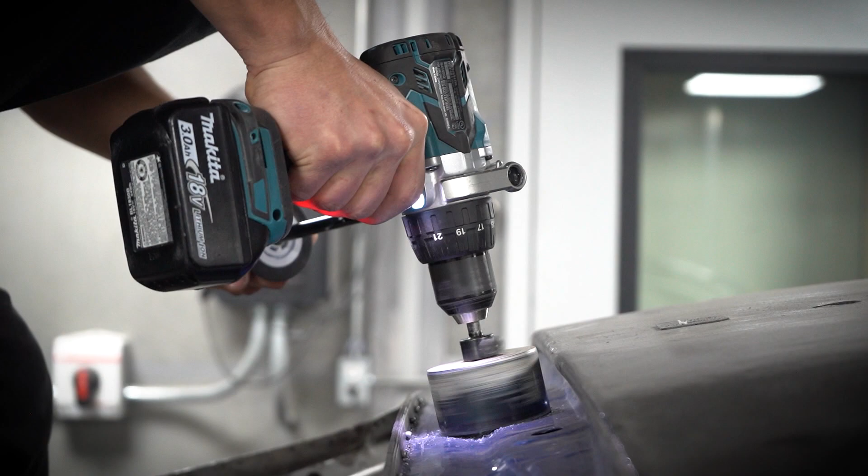So yeah, a lot of you last year have kind of asked or been curious about what goes on with Kels on a bit more of a deeper level. So Jesse had the idea of trying to show you a little bit of what we're doing here. Last year the car was really good, but there were a lot of little things that weren't quite right. So this year the main goal is to improve the downforce to weight ratio of the car. Without adding too much drag, hopefully we can increase the downforce a little bit and then get some weight out of the car. And otherwise, we're going to do a little bit of work to the engine.

You know, that engine was pretty special, as you guys know. So we're sending it off to Jim Wolf to have a go over, make sure all of his crazy ideas don't have any problems. He has the engine now, he's taking it apart. Everything looks pretty good, a tiny bit of bearing wear, which we expected. But altogether everything was pretty good. The leak down was fine, so the engine was still healthy.

We're gonna get rid of the variable cam control. That's gonna save us like 6 or 7 pounds. And we really don't need it with the electric torque in the mid-range and the sequential gearbox. So by getting rid of the variable cam control, we can increase the compression, because we were limited on the piston before with piston to valve clearance.

Now that the cam's not advancing as much, the piston can have smaller reliefs on the intake side, so the compression will go up more. The rings can move up higher because they were held down by the pocket for the intake cam, so that'll help a little bit as well. Otherwise, the engine's mostly the same, maybe a different camshaft for the exhaust. We had the header Swain Tech coated to try and keep some heat out of the engine bay. That's pretty much it for the engine side.

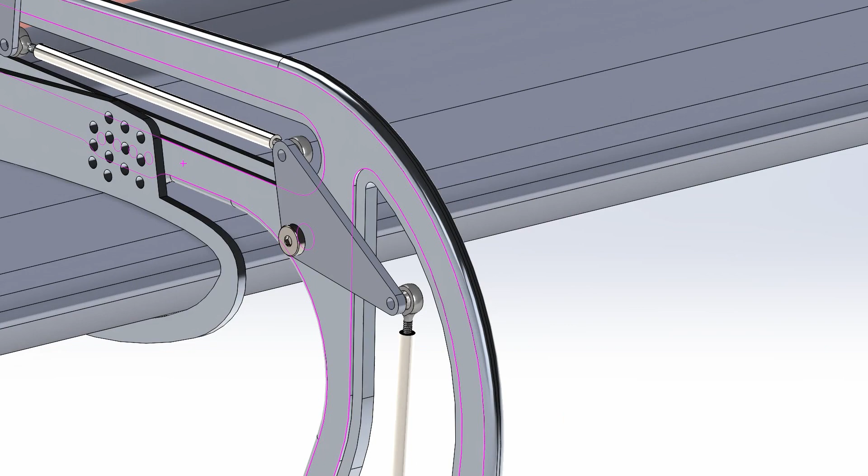So we looked at doing this a few different ways. I think the best way to do it, the simple, light way to do it, is just going to be through pulling up the flap like in Formula 1 and just breaking the second flap from the main element and just having the two wings running at basically zero angle of attack in the straightaways, and then the Motec will control all of that.

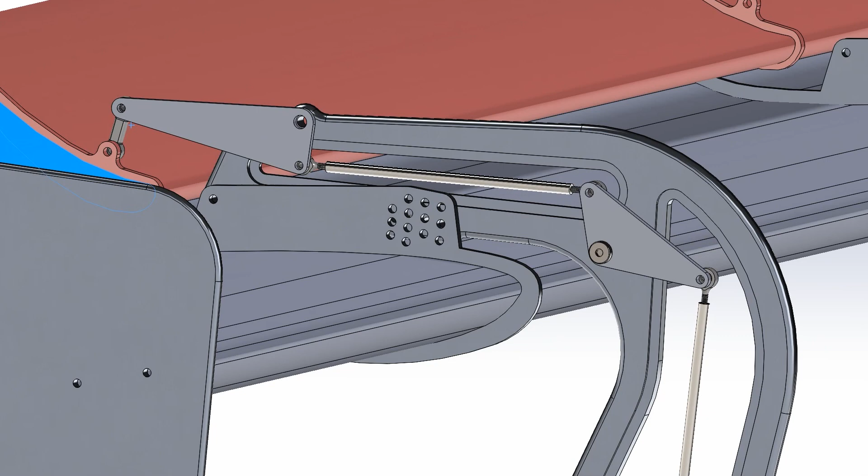Obviously, we'll have a safety in place with detection of the position. So basically 2 seconds or so before the braking zone, the wing will close. If it doesn't close, I'll be alarmed early enough in advance that I can brake in a straight line, because obviously the car will be really front aero balance at that point, so you won't want to trail brake at all. So brake in a straight line and get the car slowed down enough without losing control by the time you have to turn in.

So I think with that safety in place, we should be okay, even if we have a failure in the control system. What else do we have here? We're hoping to do a new diff. That would be really great. The Nissan differential is just getting really hot. That diff that's in the car's had a tough life, so we're excited that we've got something coming that might be really great, but it's too early to say for sure.

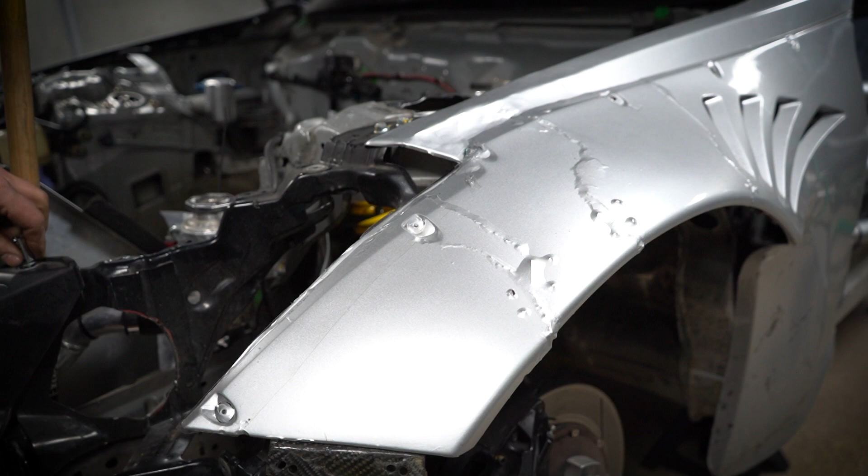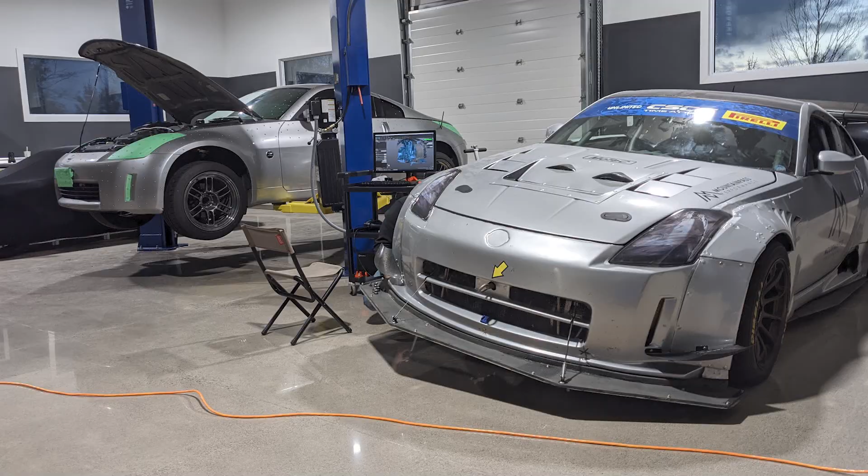We are hoping to do a new front end. Kels, as you guys noticed, the bodywork has been kind of the weakest link on the car since forever. It's not really our skill here, it's composites and that sort of thing. We don't really have much ability or time for that, but we did have some great help designing a new front end for Kels with the scan data that we did, and it's going to kind of be like a GT car. It's not going to be a crazy time attack thing, so hopefully that gets done in time. I'm pretty confident that it will.

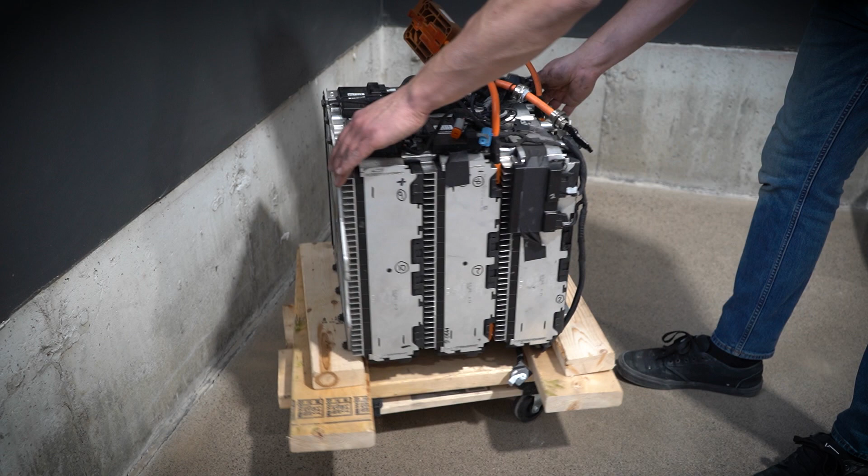We were thinking about doing an upgrade to the battery and a new inverter to increase the voltage. The main problem we're having right now with making more power from this hybrid system is that we don't have enough battery voltage. Adding another module in series would increase the voltage to about 480 volts and increase the power by about 16 or 20%, which would get us close to that 200 horsepower goal.

But we might not do that because the battery is going to add more weight, it's going to add complexity, there's going to be a lot of ducting and mounting work, and then the motor's already overheating right now. So we'll add more power, but we can run for a shorter period of time. It might just be better to leave it. I haven't decided yet on that. Like I said, the weight reduction is kind of the main focus.

When you have a lot of downforce, the sensitivity to weight increases because the amount of downforce you have is a percentage of how much weight you have. So if you've got this much downforce and you decrease the weight so that your downforce is twice your weight, for example, then you have a huge step up in grip. Whereas if your weight and your downforce are the same, that downforce isn't doing as much additional grip for you.

So, it's kind of like where you see a really heavy GT car with no aero and a really light car, like a Miata and a Camaro. Their lap times aren't that different, even though the car is so heavy. But if you were to put the same amount of downforce on each car, the Miata would basically be like a prototype, and the Camaro would be just a little bit faster, for example.

Not that we're going to get a huge amount of weight out of it, but spending time getting weight out of a car with a lot of downforce is worthwhile. We're also overheating the rear tires, so getting weight out of the car in general might help with that. Might make it worse, I don't know.

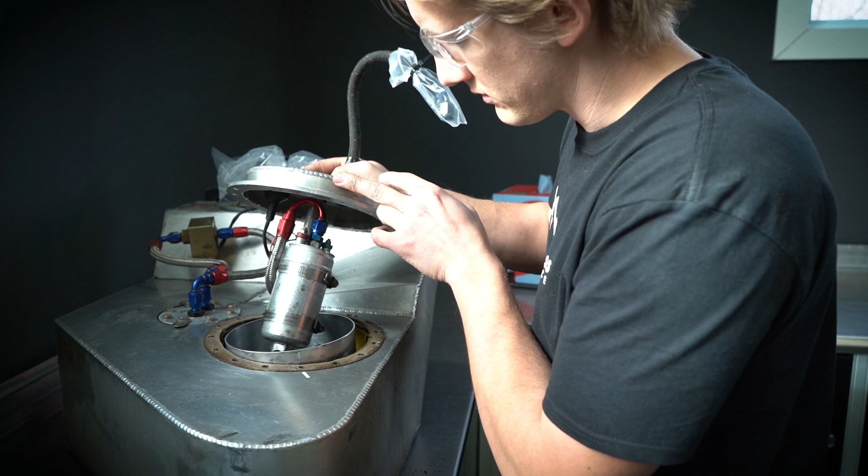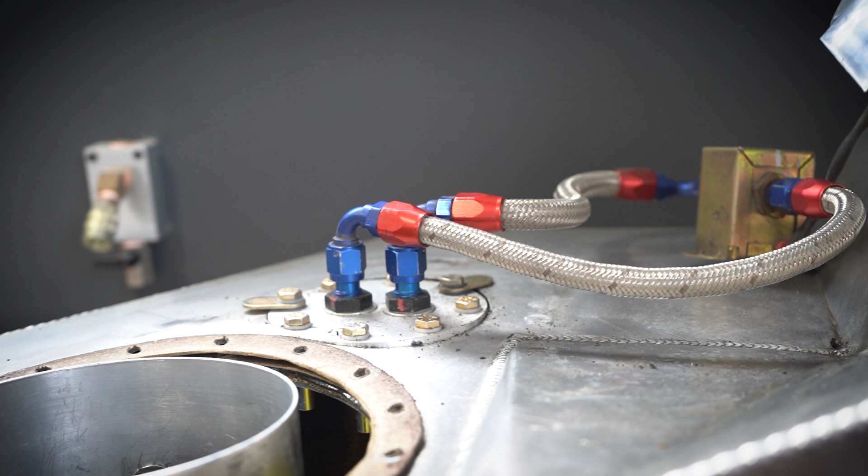What else do we have here? The fuel cell - kind of a stupid problem we knew was probably going to happen. We had 2 lift pumps before. We cut the fuel cell in half to fit the battery, and when we did that, we only have 1 lift pump now feeding the swirl pot. When the fuel is all loaded up onto the middle of the car, when we're turning right, the lift pump isn't getting any fuel in the swirl pot. The top of the swirl pot is open a little bit so that whatever's in it can mix with the rest of the tank, which is good for endurance racing and keeps the fuel temperature low. But now with that one little lift pump that can barely keep up, when we corner and lose half of that swirl pot out into the rest of the tank, the lift pump isn't really doing anything because all the fuel is up in the middle of the tank, not getting picked up. We were getting fuel pressure errors, and the car was having a miss in certain corners, like coming out of 1, coming out of 5.

So those are corners where you've got a lot of sustained high right turn G-force, and then all of a sudden you want power. There's no fuel in the swirl pot - it's just a burp and then the car's back, but it's not good for the engine. It's frustrating and it's just not right. We'll seal up the swirl pot a bit better, and then we might add another lift pump in parallel so that when there's fuel in that pocket, it's dumping into the swirl pot faster.

We've got to fix the windshield.

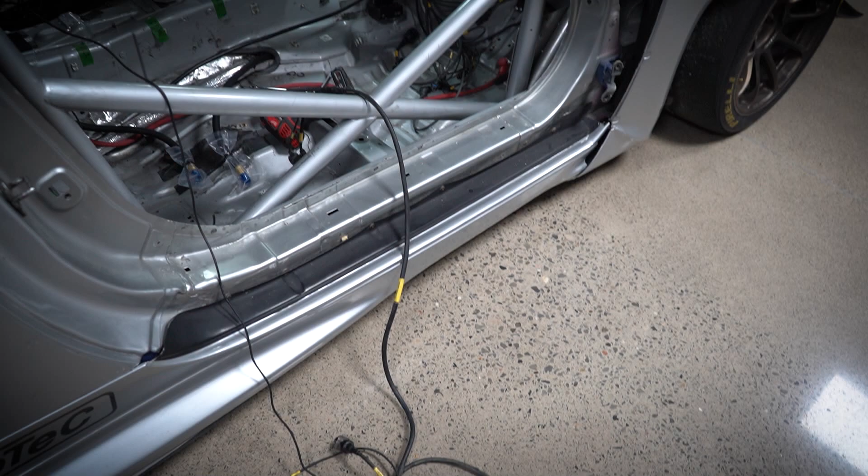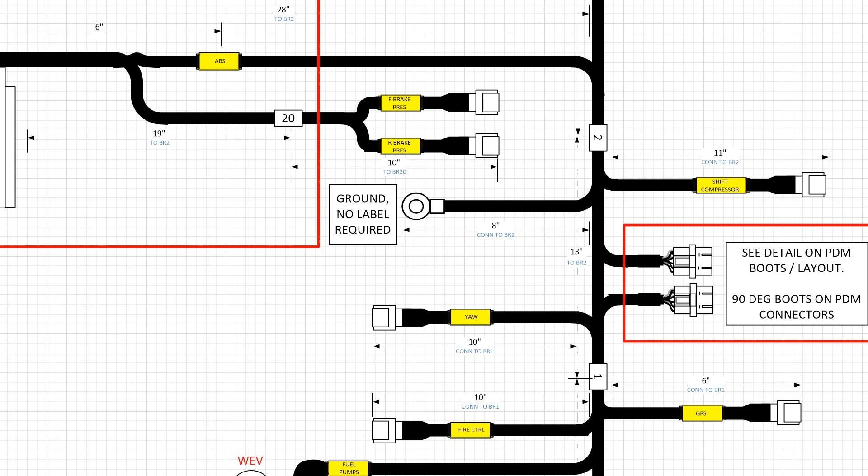The harness is going to be a lot lighter. We also put a PDM in, so we had all this really massive switch box wiring that was doing a big loop and going back into the PDM. We've got a ton of high power wire there that's really heavy, that's not going to be there anymore. So that'll be good for weight reduction.

We're hoping for around 100 pounds of weight reduction. I think we were like 30 pounds on the chassis, about 30 pounds or so of less fuel we'll be able to run when we fix this fuel starvation issue. Maybe 10 or so from the chassis harness. If we do the front end, that'll be another 10 or 15. And then the rest we'll just bullshit our way through.

I think we also have some adding - we're adding a little bit too. We have the windows we're adding. They weren't light, they were like 4 pounds or something each, they were kind of thick. So anyways, if we get close to 100 pounds, that would be really great. That's probably a second-ish, maybe, a lap at most tracks, just a bit under. And then part of it was just the fact that the car was starting to get loose and lose control a little bit.

The car was just overheating the tires, so we're getting some weight out of the car. If we add power, we're just going to make those problems worse. I want the car to be more enjoyable to drive over a number of laps - nice to do a sprint race with this thing, not just 2 or 3 laps. With the hybrid system now, with the power turned down a bit, we could run it indefinitely. So that's not the problem - the problem was really the brakes.

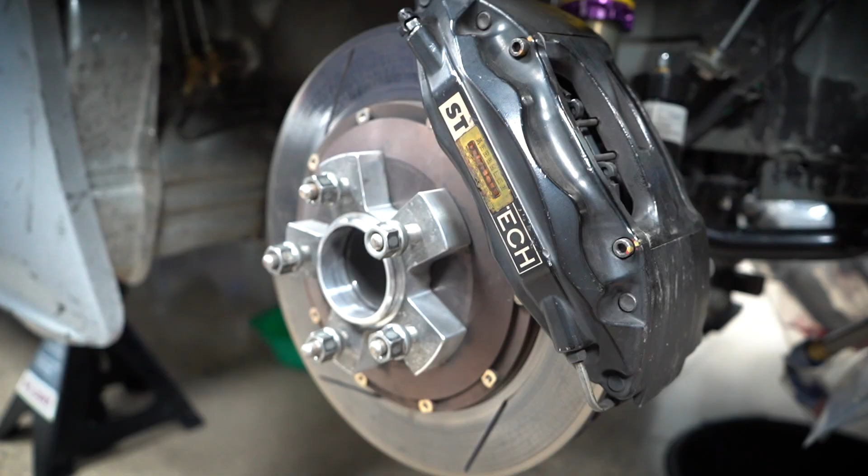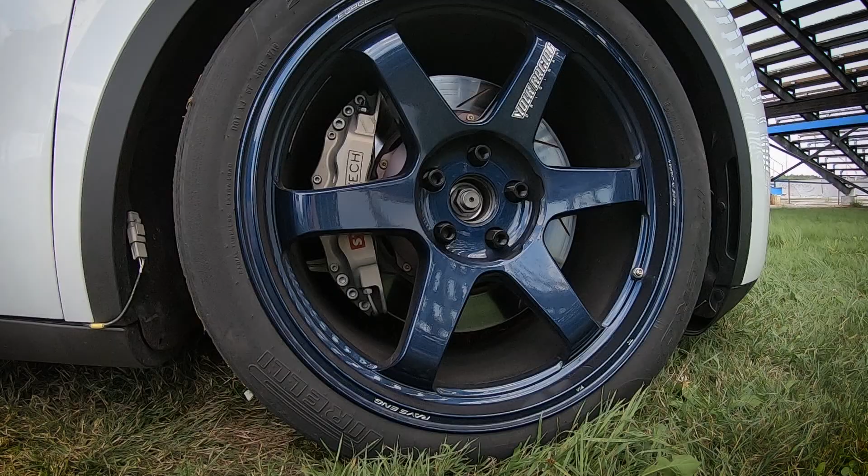We need to redo the brakes too. They've been on there since about 2002 - StopTech ST40s in the front, rebuilt a couple times, and the factory Brembo little baby track package rear calipers. StopTech hopefully is going to help us out with the front. We'll probably go to the same thing on our Model 3 kits, the STR60 with a 355mm disc, and the back probably an ST40 with a 328, or maybe even their small 2-piston with a 25mm rear rotor. We don't need a lot of rear brake - the car's pretty front heavy, it's got a lot of downforce, so you just don't use the rear brakes a lot.

So that'll add some weight too, is what I was getting to. 100 pounds might be a little optimistic, but the car's pretty heavy - about 2830 or something without me, then with fuel we're about 3,000 pounds. That's pretty heavy, heavy for a time attack car. It's about on par with a modern GT3 car, but they're all pretty heavy too, so it would be nice to get that down a little bit.

So we're kind of optimistic on the work we're trying to get done this year. Generally we haven't been too secretive about what we do, I just haven't had time to talk about it much. Jesse wanted to do this video series, which is a good idea, so we're going to talk a little about what we're doing. And I have to say, whatever we say we're going to do doesn't mean we're going to do it.

These are our goals right now - if they don't happen, don't cry about it, don't say we told you so. We're just sharing with you what we're planning to do. If we're busy with Mountain Pass, or if we've got some really cool products that are more important, then we'll focus on those. These are really just nice to do things for Kels, because the car's had a lot of development in the last 2 years and there's just a lot of rough edges. So if we can fix a lot of that and get the car to a more professional level, it would be nice.

But if I had to pick one thing, I would really like to do the front end and clean up the bodywork on the Z, because for how cool the electronics are on that car and how cool the car is in general, it really doesn't look the part. So it would be really nice to fix that up and get it to look like a real GT car.

So yeah, that's kind of the update. Jesse will have shown you some of the drawings and stuff I've been working on here as I've been speaking.